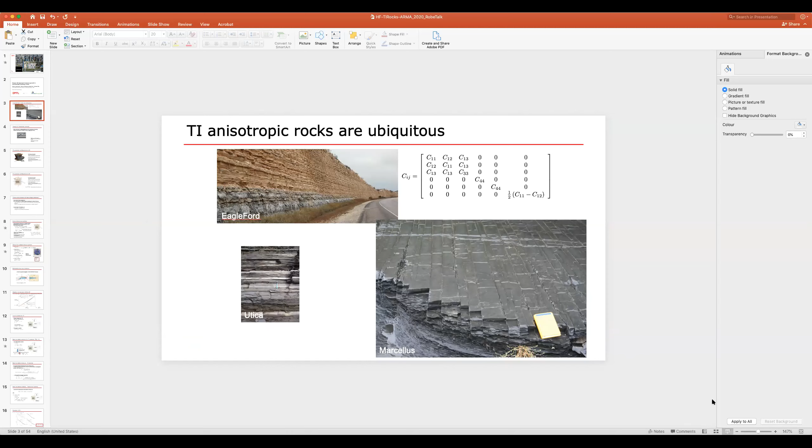I'm seeing some people chatting that they don't see my slides, so I don't know why - that's very strange. Okay Brice, I can see the first slide, but it seems the slide is not moving. Probably you put the display on presenter mode. Yes, it's moving, but right now the slide is in edit mode, not slideshow mode. So if I move to slideshow... okay. You may have multiple screens. Yes, okay, I see what you mean. Let me do something - I will stop sharing and share my screen again. Excellent. You guys see the slides now? If I change it? Yeah. Yes, go ahead. Okay, wonderful.

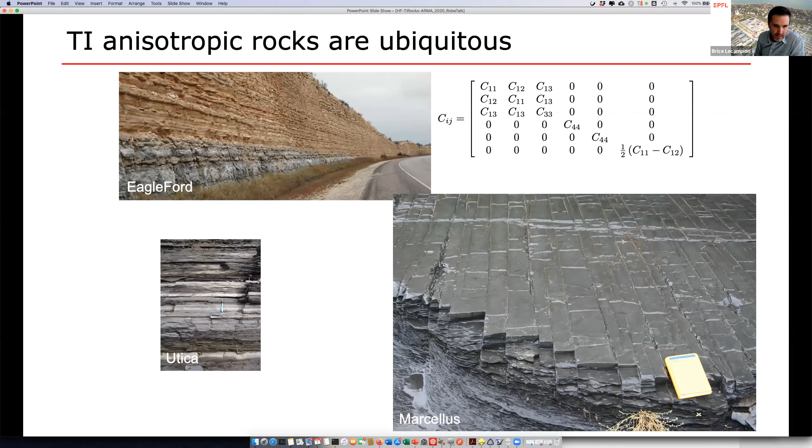So basically, as you see in these pictures, I think we all agree that rocks, especially unconventional ones, show transverse isotropy, and most of the prior work has been done on plane elasticity. In this sketch, most of the cases look at plane strain problems where people have studied the deviation or curving of fractures due to this transverse isotropy in plane strain.

There's been a lot of work on what I could call dry mechanics on this problem, dating back to the 1960s, and some people have also looked at it in the context of hydraulic fracturing. I'm not going to talk about that case today, because in most situations of practical interest, the situation is really three-dimensional.

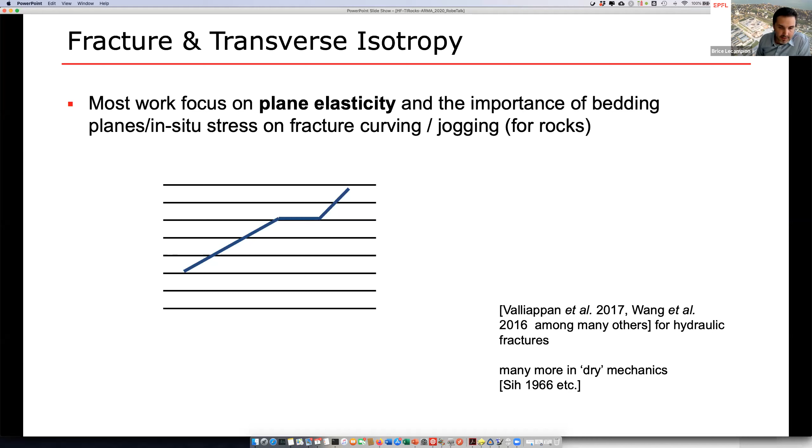So I will switch to the next slide and look at the case of a horizontal well where we have a hydraulic fracture - a horizontal well drilled in the direction of the minimum stress, with horizontal layering. This horizontal layering represents the material isotropy plane.

In a lot of unconventional reservoirs, we have either a normal or sometimes strike-slip stress regime. There are some cases with a reverse stress regime, but normal and strike-slip are the most common. In that regime, the fractures grow in a plane perpendicular to the material isotropy plane - the fractures grow vertically, and the material isotropy plane is horizontal.

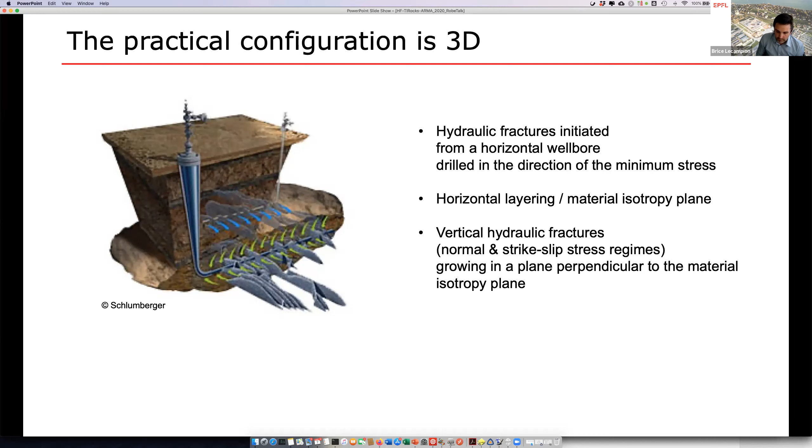So we are in this situation where the fracture has a three-dimensional nature. It's probably more elongated in some direction, and it's vertical, perpendicular to the isotropy plane.

So in that limit, we can look again at a model of planar three-dimensional fractures. This limit can be investigated in the case where there is no deviation of the hydraulic fractures in the bedding plane, so the fracture will always propagate perpendicular to the bedding planes. You'd imagine the bedding planes are usually weaker, so the hydraulic fracture may want to deviate into those planes. But here we're looking at a case where the vertical stress is sufficiently large to prevent that from happening. So at a continuum level, we have a planar hydraulic fracture propagating perpendicular to the material isotropy plane.

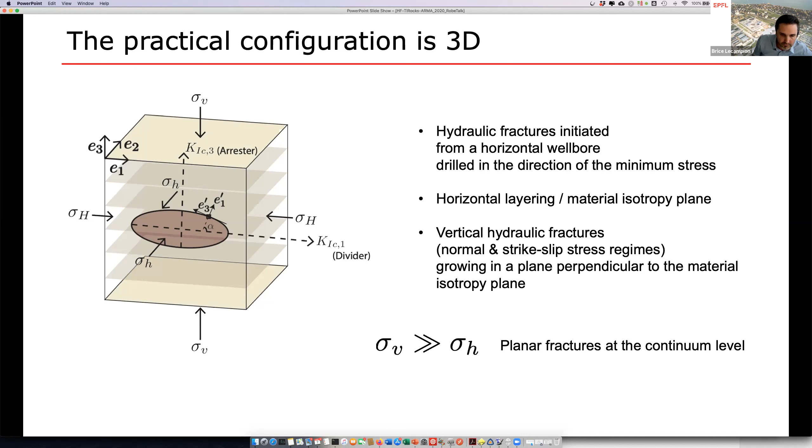I don't know why my slides automatically switch to the next after 2 seconds. It's a bit strange.

So we want to look at the case where the in situ stress field is uniform, so no stress jump. We want to investigate how the transverse anisotropy of the rock controls the deviation from a simple radial hydraulic fracture geometry, because we know that if we are isotropic with just a point injection, the fracture will be a radial shape. But how does the anisotropy change that picture?

The first thing: what is the shape of these fractures? And then, what is the effect of the anisotropy in the competition between viscosity dominated propagation, where most of the energy dissipated is into fluid flow in the fractures, and toughness dominated propagation, where the energy spent is in really breaking the rock?

So for simplicity, in the following, the rock is impermeable, so I will assume there is no leak off, and the rock is also homogeneous. So basically all the layering is treated as a continuum, as a transverse isotropic rock.

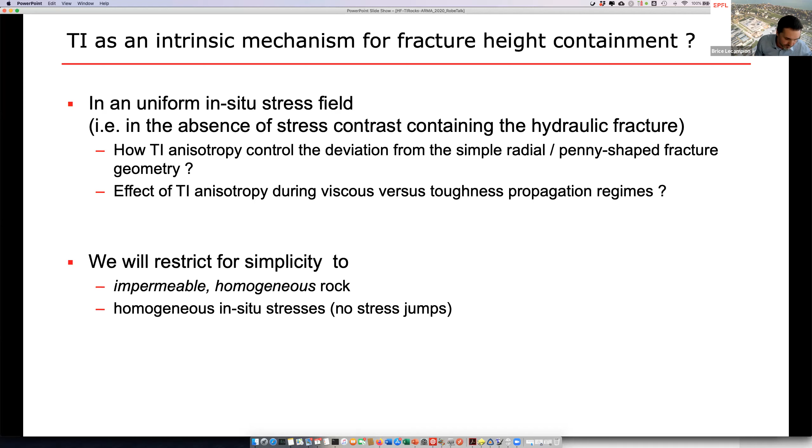So the thing is that fracture mechanics become slightly more complicated in the elastic transverse isotropic case. Slightly is an understatement - it's quite more complicated. So our stiffness tensor now has five parameters, and the expressions are more involved.

But you can still show that in that configuration of planar fractures, the fracturing mode decouples. What does that mean? It means that the hydraulic fracture being normal to the minimum in situ stress, there is no shear acting on that planar hydraulic fracture, and basically the opening mode doesn't induce any shear stress on the plane of the fracture. So we are pure opening mode - the shear and normal mode decouple like in isotropy, but in the case of transversely isotropic media.

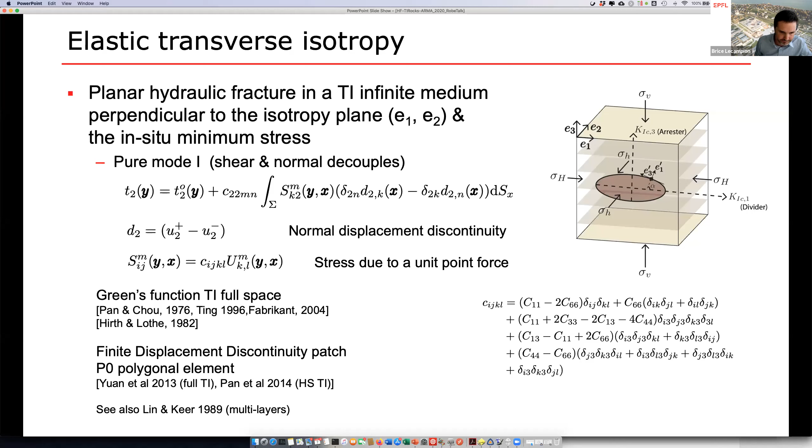So now, just recalling very fast the formulation of the problem for the case of hydraulic fracture propagation: we have an elastic boundary integral equation, as mentioned before, where now the traction on the fracture surface is the fluid pressure minus the in situ compressive stress, the minimum horizontal stress. This is the net pressure, which is related to D, the fracture opening, in our notation. After that, we have the classical assumption for an impermeable medium of lubrication flow with Poiseuille flow. And then we have a propagation condition, which I'll come back to in a minute for the case of anisotropy. I'll talk about sufficiently deep fractures so that the fracture front and fluid front coalesce - the case of zero fluid lag, which is achieved at practical depths very quickly.

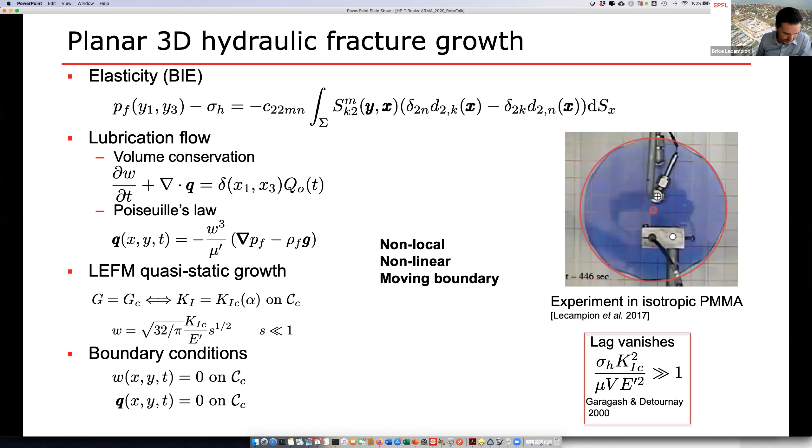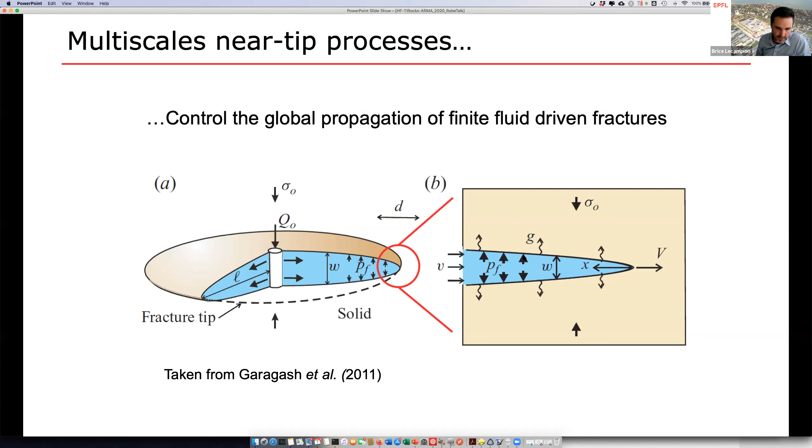So this class of problems, we know they're really affected by what is happening near the fracture tip, and the competing processes of viscous dissipation and breakage of the rock really clash at the fracture tips. So for a radial hydraulic fracture, you can zoom in close to the front. If you're sufficiently close to the front, you can view the problem locally as a semi-infinite fracture propagating in plane strain. That's important to understand. And after that, there's been a solution of that problem, coupling elasticity and fluid flow, that has been obtained and actually verified experimentally. So in this plot, I just recall it.

These are experiments from Andy, where he measured in transparent material the width of the fracture with distance to the tip, and also measured the velocity of the fracture. He remapped it into this semi-infinite fracture solution, where you see a transition between two regimes: one where fracture toughness dominates, with the square root behavior of linear elastic fracture mechanics, and a far field behavior governed by viscous flow, a two-thirds asymptote. So that's for isotropy, okay?

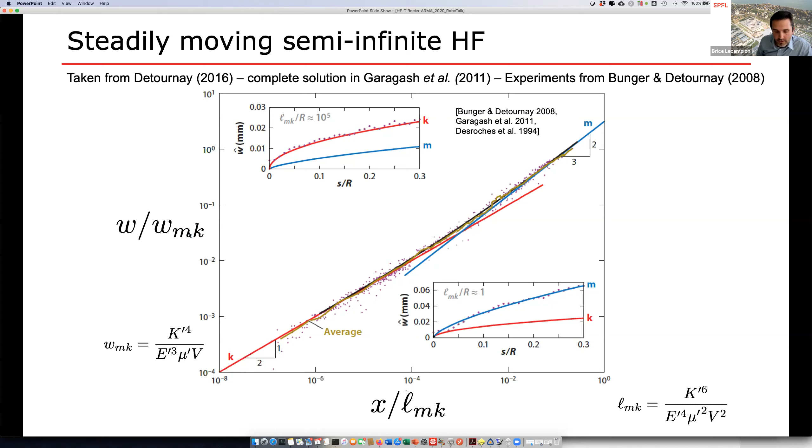So the point is, when we move to anisotropy, what is going to happen? Let's go back and first look at the configuration. I will go over the sketch. So we have the fracture, which is here.

So that's important because if we recall fracture mechanics, there is a relation between stress intensity factors at the tip and the energy release rate. This is the so-called Irwin relation, which applies for coplanar fracture growth. And that's related, so G, the energy release rate, to K, the stress intensity factor.

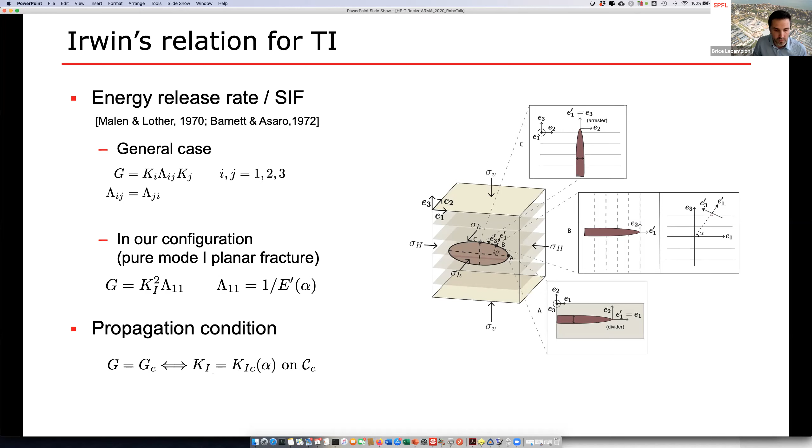So after, you can do some maths and get this expression of E prime alpha. I will not go into the details, but basically by a change of coordinate system and knowing the solution for dislocation in orthotropic media, you can get the expression of E prime alpha, and you can show that the elastic operator for this plane strain configuration has exactly the same form as the isotropic one, pending the use of this E prime of alpha.

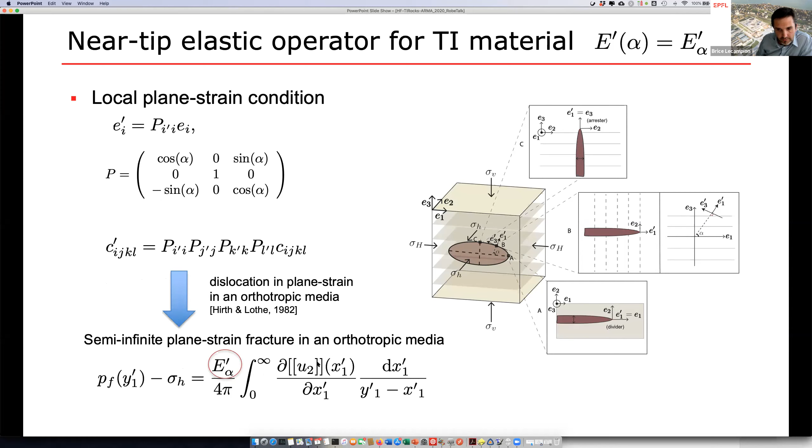So E prime of alpha has a nasty expression. I put it here, but it's analytical. You can get it analytically, and you also have expressions for limiting conditions, so we get back known expressions in the case of alpha equals 0, in the divider direction, or in the arrestor direction.

So this is analytical. What is it function of? It's important to discuss this. It's function of beta, which is the ratio of the modulus in the divider versus the arrestor direction. So this is like the intensity of anisotropy, and also some Thomsen parameter, which characterizes the anisotropy of the rock, and the ratio with C13 over C11.

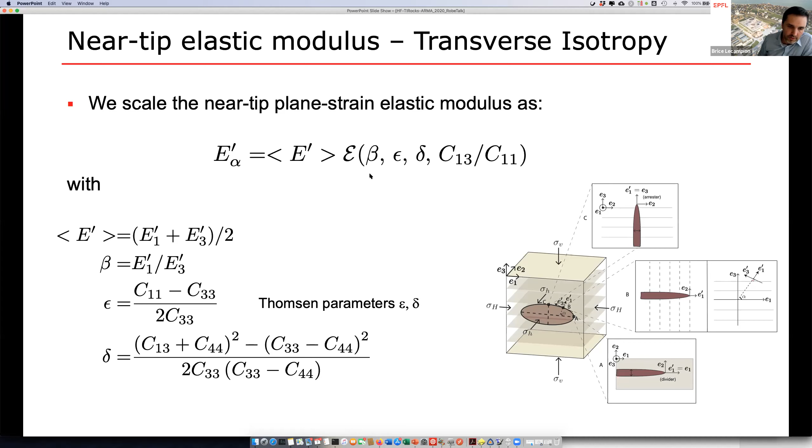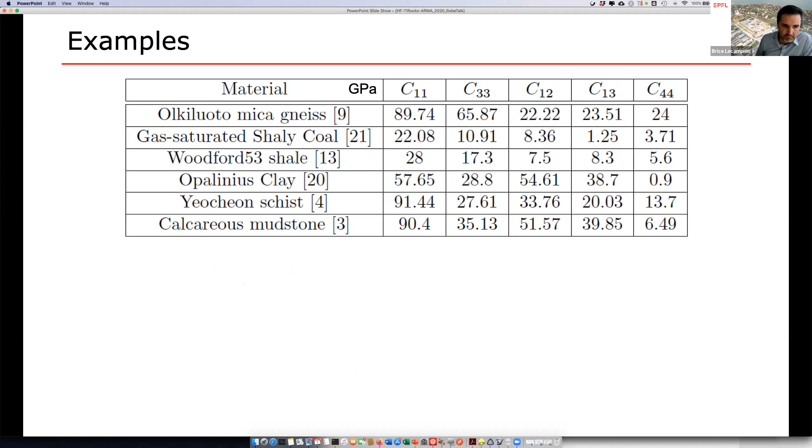So some examples of rocks. We took several rocks just to give you an order of magnitude of the type of change. The most important parameter I want you to pay attention to is beta, since it has the first order effect that I'll discuss mostly. For normal rocks it can vary from mica gneiss 1.15 up to very anisotropic values, the most anisotropic we could find, close to 2. So the range of variation is between, let's say, 1 and 1.6 for most rocks.

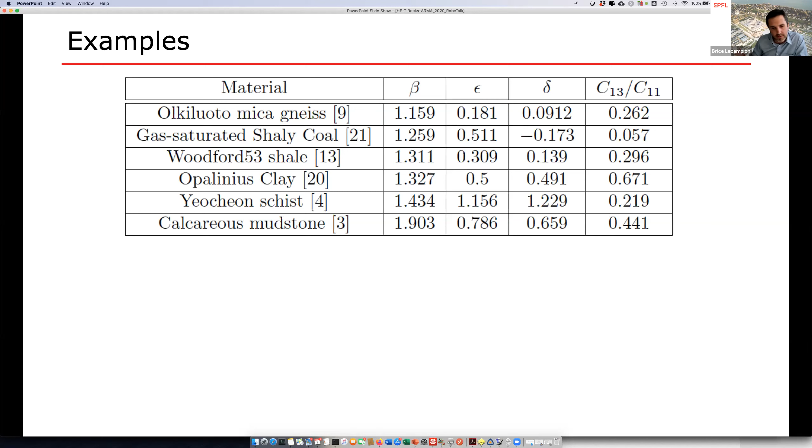Okay, so that's for elasticity. Now, what about fracture toughness?

Sorry, I have a problem with my slides that automatically shift.

So for fracture toughness anisotropy, there is very little lab data. Most laboratory data gives values in the divider direction and the arrester direction, but as a function of this angle alpha there is very little. Most tests are done in another configuration, between E2 and E3, and not in this E1, E3 plane.

Nevertheless, there are a few publications with some values, and it seems that between the divider and arrester directions the toughness can vary between maybe 1.1 to 1.6. So again, a range which is not an order of magnitude, but you can have variation between these two. Of course the toughness in the bedding plane is usually much weaker than this.

So after that, that's let's say the toughness in the two directions, and then you need a law for the evolution of the toughness as a function of this propagation direction alpha. A simple law you can use, if you don't know anything else, is to use this cos-square sin-square form as a smooth transition between the two. That's a possibility.

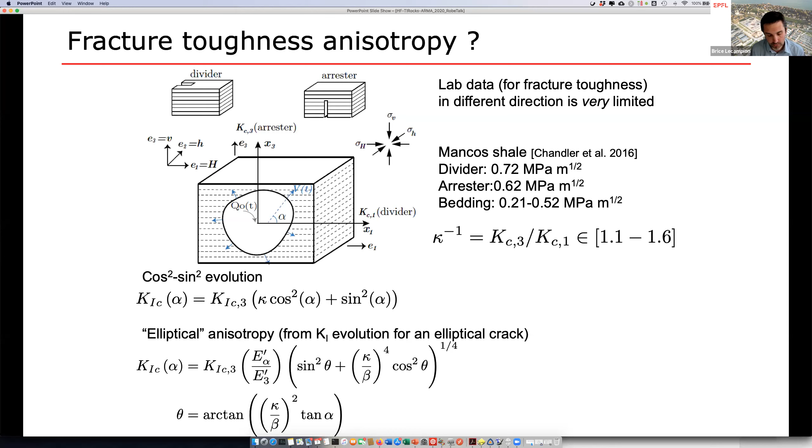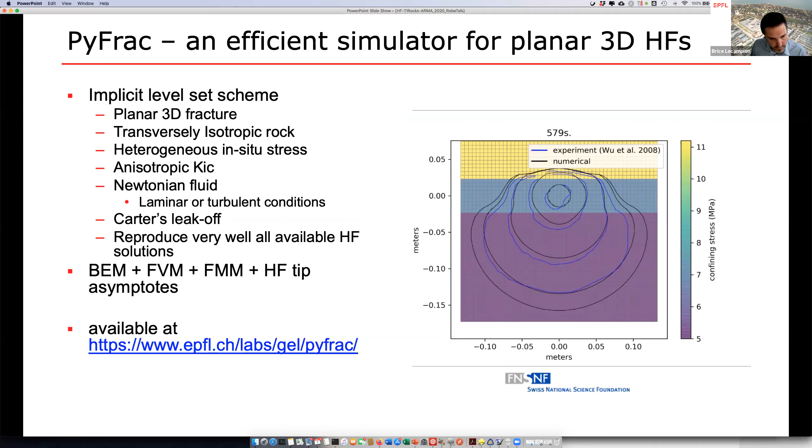So what I'm going to present next is mostly numerical results. We have redeveloped a Planar 3D hydraulic fracture simulator including transverse isotropy. This simulator is based on the implicit level set method, I will not go through it in detail.

I'll just highlight that these schemes use the tip asymptotes near the fracture front. The key point is that these hydraulic fracture tip asymptotes allow us to have a slightly coarser discretization while remaining extremely accurate. The scheme iterates the fracture front as a level set through the Cartesian grid, and for elements cut by the fracture front, the tip asymptotics are imposed and coupled with the cells inside the fracture, where these ribbon cells, shown here in magenta, are used to couple the tip with the center of the fracture, the channel.

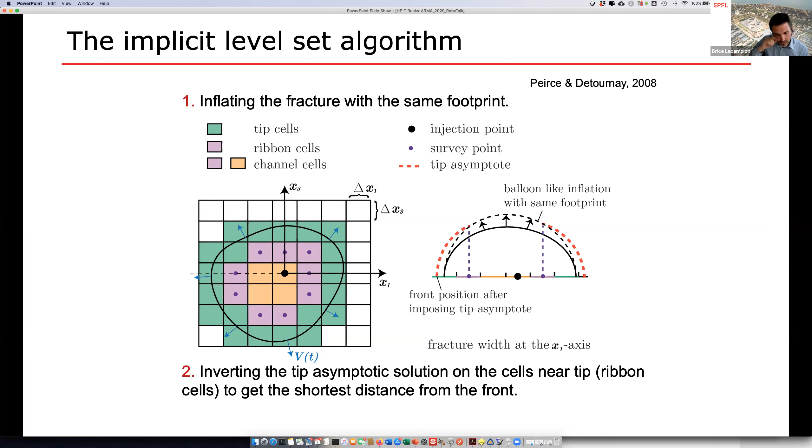I'll skip that and just make the point about what changes in the case of transverse isotropy. First of all, you need a displacement discontinuity method which handles the transverse isotropy of the rock. That exists, and some elements for transverse isotropy exist in the literature, so we use those. Then, as I mentioned before, we can use the plane strain configuration the same way as in the isotropic case, if you use the proper modulus, which is a function of the propagation direction.

This means that when we invert the tip asymptotics in the scheme, we don't know a priori the propagation direction, so we have to iterate for it. We invert the tip asymptotics for a given trial propagation direction, which is the one from the previous time step. We propagate the fracture front, check again the propagation direction at all the survey cells, and we repeat that until we converge.

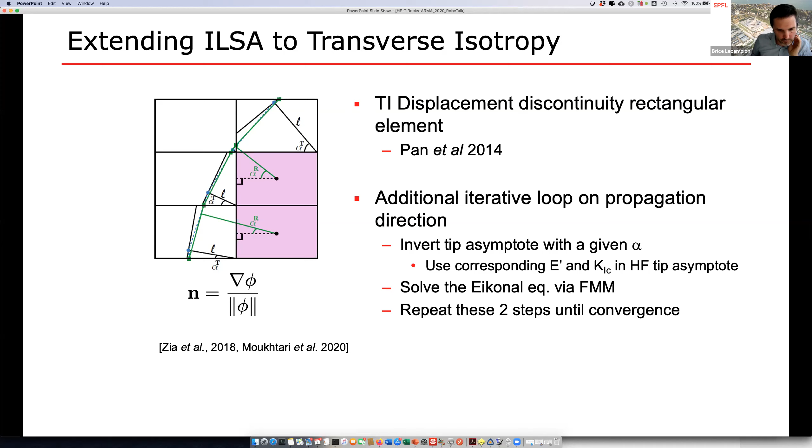So basically, it's a bit more heavy than in the case of isotropy. First of all, verification.

The elliptic crack in a toughness-dominated regime has a solution that can be derived analytically. It's only valid if you impose a peculiar form for the evolution of the fracture toughness with the propagation direction, with this angle alpha. If you impose this peculiar constitutive relation for the fracture toughness, you should get exactly an elliptical fracture, and its growth is self-similar in the toughness case.

We can use this to benchmark the code, and we did, and it's working very well. We get exactly the values of the minor and major axis, and their evolution with time follows a power law, exactly the same as in the isotropic case. The propagation is self-similar for an ellipse, and the difference between our numerics and the analytical solution is less than 2%.

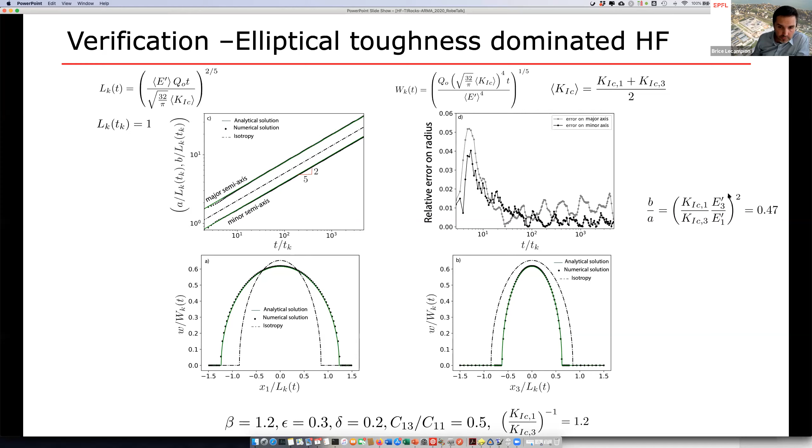Interestingly, there is also a scaling for the aspect ratio. The aspect ratio of the ellipse is a function of the ratio of the toughness in the two directions and the moduli in the two directions, to the power 2. So even with slight anisotropy of moduli and slight anisotropy of toughness, if they are compounded to the power 2, you get a very elongated fracture.

Now for the general case, recall that in an impermeable medium, if the material is isotropic, the hydraulic fracture solution is a radial shape, evolving from an early time solution dominated by viscosity to a late time solution dominated by fracture energy, or toughness. There is scaling, and even exact solutions, in these two regimes, and there's a transition time scale, TMK, which gives the time it takes to transition from one regime to the other.

In the case of transverse isotropy, the fracture is not properly radial anymore, so we are looking for the shape of the fracture. We can scale it with a characteristic length scale, which is a function of the elastic anisotropic parameter - the Thomsen parameter, beta, C13 over C11 - the ratio of toughness, and also the transition between viscosity and toughness dominated regime. This time scale of transition depends on E prime and K prime, so we can define one for the arrester direction and one for the divider direction - vertical and horizontal.

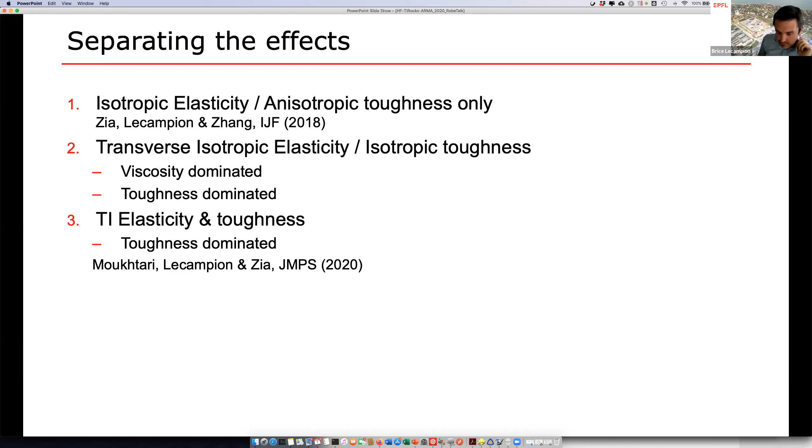So with fracture toughness anisotropy only, at the beginning, because there is no elastic anisotropy, the fracture is radial - the two semi-axes are equal. Then after a while, you have a transition toward toughness dominated propagation, which is faster in one direction than the other, related to the difference in time scale between the two directions, which is 500 in that case for a ratio of toughness of 2.

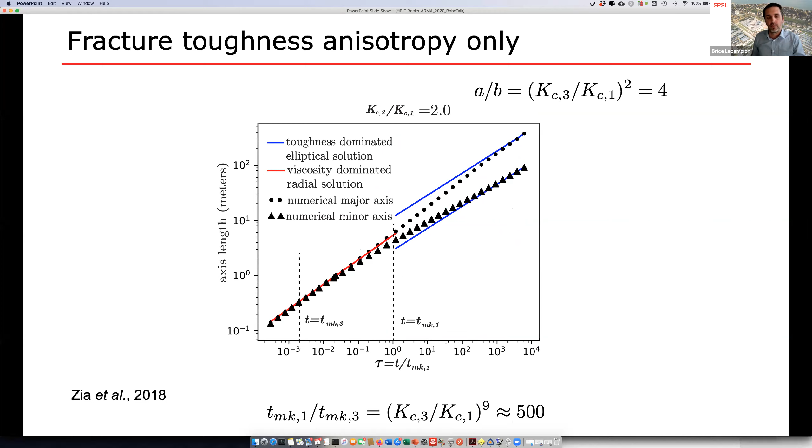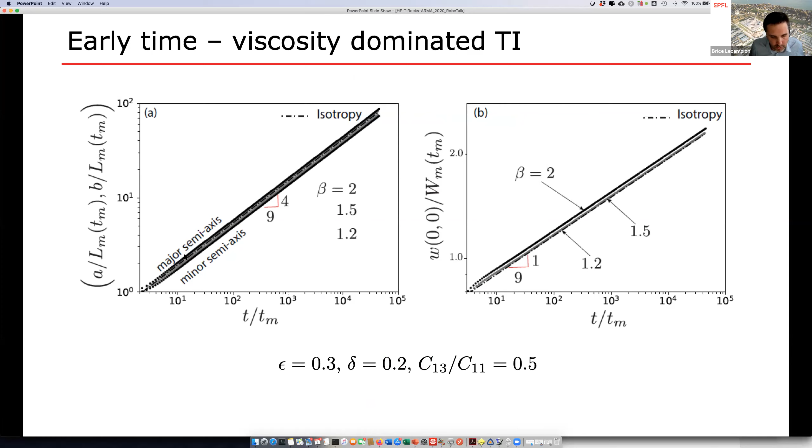Now, if I switch to putting in elastic anisotropy and look at early time, viscosity dominated, we get the same type of power law behavior as in the isotropic case. The fracture gets slightly elongated, but in this log-log plot you don't even see it - the effect is not large. So you could look at it in terms of the fracture footprint.

And the scaling of the elongation, so if you take the minor axis and the major axis, B over A, it evolves as beta to the power -1/3, and you can recall that scaling from the tip asymptotics actually.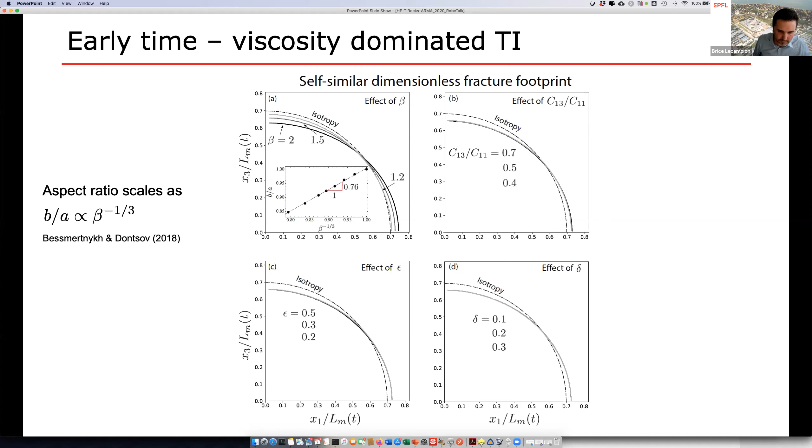Now, if you go later in time and look at the toughness dominated case, the fractures also propagate in a self-similar fashion, similarly to the isotropic solution. But now you see that the difference between the minor axis and the major axis is much larger. So now we start to see the effect. This is the case of an isotropic toughness, only anisotropic elasticity.

So if you look at the self-similar shape, they are much more elongated. And as you increase beta, which is the primary factor, you get relatively large elongation. The effect of the other parameters, C13 over C11, epsilon and delta, are really second order, as you can see - they don't affect the shape very much. The scaling here is beta to the -2, so the effect of beta is large on this elongation.

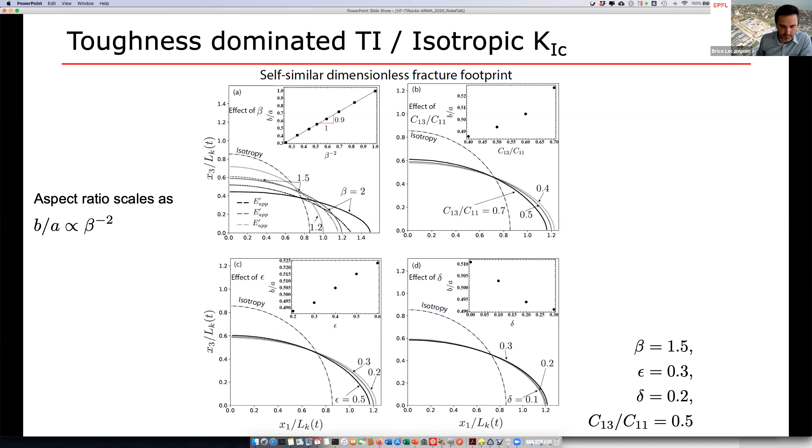I will not go into the fracture shape further, I will just now make a few points. In the viscosity dominated regime, early time, the effect is relatively small on the footprint, which stays relatively radial. There is a small effect on the width and the pressure.

There is a very strong effect in the toughness dominated regime. I didn't mention, but the fractures are not really elliptical because the toughness is isotropic, but they are close to it - maybe 10% off from an ellipse. The effect of beta, the ratio of moduli, is order 1, and the aspect ratio evolves as beta to the -2. Another point is that the transition between viscous and toughness regimes scales to a power of 13 over 2, so a very large power. So you have a very different time scale of transition in the vertical and horizontal directions.

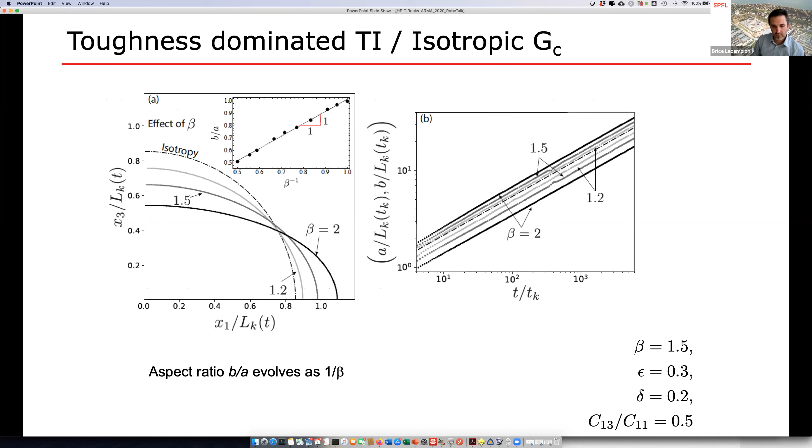You can play around and look at the case where you have isotropic fracture energy instead of isotropic toughness. In that case, the elongation scales with beta to the power -1. This is directly related to Irwin's relation between stress intensity factor and energy release rate. So the conclusions are the same, it's just that now the scaling is as a function of beta for the elongation, and the time scale is to the power 2 and not 13/2.

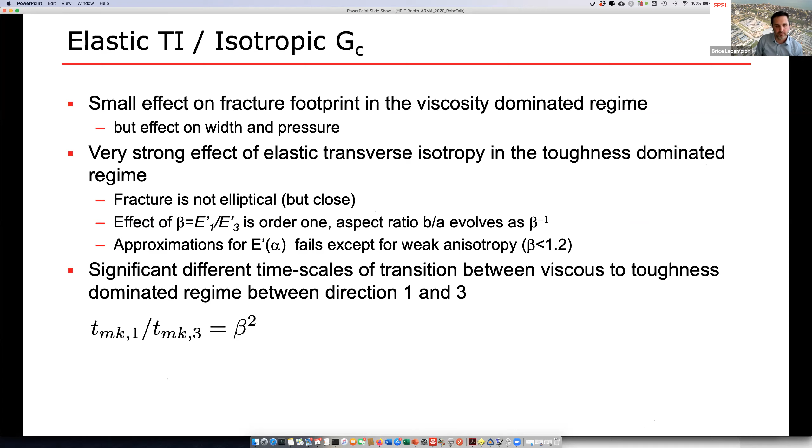Finally, you can also look at the viscosity to toughness regime transition. I just showed two simulations to tell you that the ratio of time scales that I discussed before - which scales as the ratio of moduli to the power 13/2 and toughness to the power 9 - also holds. And in the case of either isotropic toughness or fracture energy, you can see a transition from the M regime, viscosity dominated, where the fracture is nearly radial, to a case where at the end the fracture is nearly elliptical.

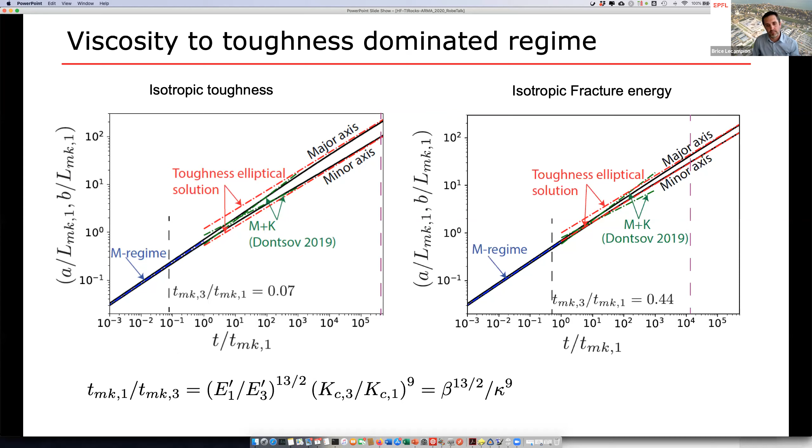Which poses the question: what is the proper law for the evolution of fracture toughness as a function of propagation direction? And the response is, of course, in experiments - this is the only thing we can rely on robustly.

So I will conclude here with a few points. First of all, transverse isotropy is always there, and I think we need some time to take this into account - I think in a lot of cases, it's important.

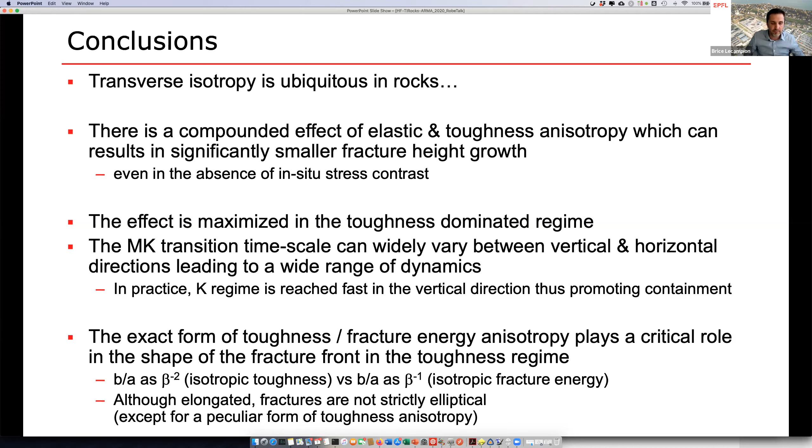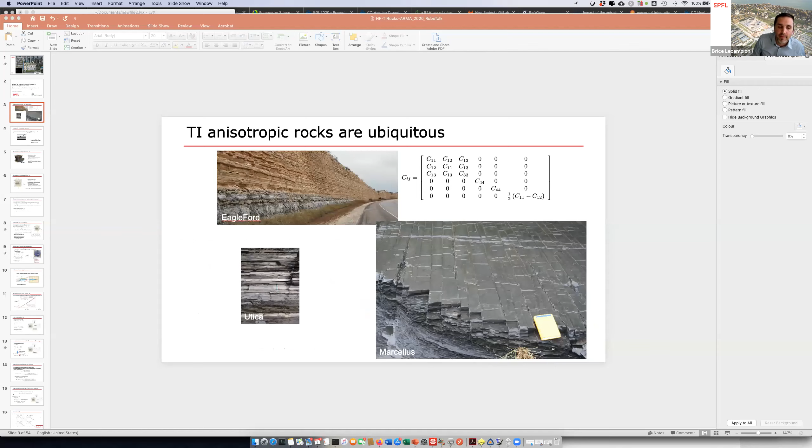So as perspective, a few points. First, we need measurements of anisotropy of fracture energy as a function of the propagation direction, and in my opinion, they are lacking. There is some along the material axis, but we need also propagation direction in other directions, for different alpha.

Also, what we want to do here at EPFL is to actually do experiments of hydraulic fracture propagation in this type of rock, to test some of the findings that I've discussed today. And we have done so — we have preliminary results, but I'm not showing them yet because they are very preliminary.

We see two things in the experiments. First, that we need very large deviatoric stress to ensure that the fracture really stays perpendicular to the bedding plane and doesn't deviate into the bedding plane at the scale of the lab. But we are able to do some experiments, and I put a picture here showing the created fracture plane of a fracture which propagates perpendicular to the bedding plane, to the isotropy plane.

You can see the isotropy plane, which is vertical here in that picture, and the fracture roughness, which is clearly anisotropic as a result of this layering of the material. This pops up maybe something that we don't have in our model yet — the fact that this fracture is so rough and the anisotropy of roughness is so prominent that possibly in the lubrication flow we have a kind of anisotropic viscous drop.

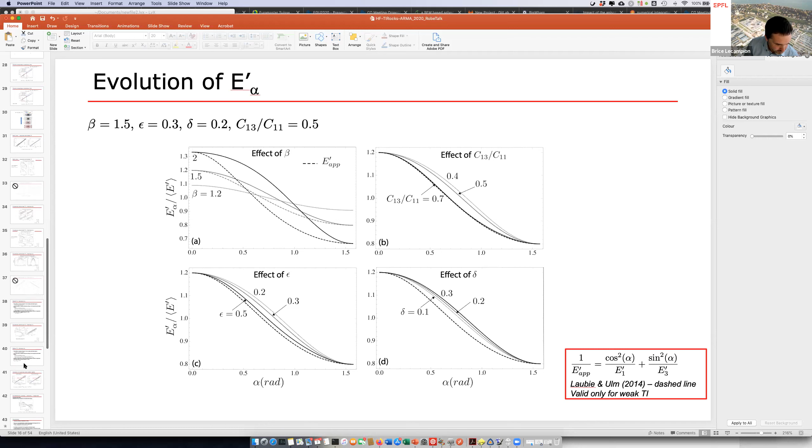After Colin, I saw your question related to the ratio of sigma V over sigma H, right? This is indeed very important, and I touched on it a little at the end. In the case of planar fractures perpendicular to bedding, the fracture never goes into the bedding plane in the model I presented today. You can also view it as a macroscopic model, so you could relax the need for a very large sigma V, and you may have jogging at bedding planes, but at a macro scale the fracture is more or less still planar. As for the limit where we'd see a transition from this planar fracture perpendicular to bedding to a T-shaped fracture, where at some bedding plane it goes perpendicular to it, I cannot answer that question. We don't have an exact criteria for this at the moment.

Romain, you asked about measurement of toughness, right, for this first perspective. We tried to do it, and it's very difficult. It's easy to measure toughness along the material axis, in the divider or arrestor direction, but in between it's very difficult. We got few measurements, but it's difficult. What we ended up doing is a semicircular bending test, which is easy enough to prepare the sample, but there's probably other configurations that need to be investigated. This is something we are trying to pursue, and if other people have ideas about this, that would be worthwhile to understand more the effect of the variation. Also, our hope in our experimental setup is to use acoustic waves, ultrasonic active acoustics, doing a 4D ultrasonic survey in the lab during propagation, and we hope to measure the fracture front evolution with time. If we see elongation, we possibly can relate it and get clues about the evolution of fracture toughness if we do an experiment in the toughness dominated region.